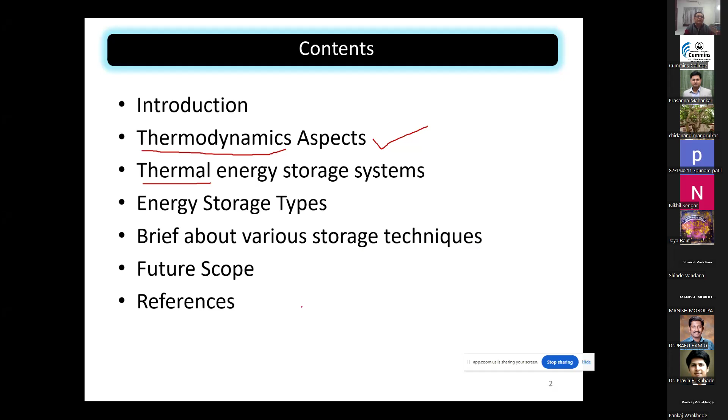Specifically, this will be related to the storage of thermal energy. There are other sorts of energies like electrical, chemical, mechanical, but we will only discuss the thermal energy storage system. Then energy storage types, what are the different types of storages, a brief about various techniques used and upcoming techniques, future scope and references. This is the broad outline of the presentation I'll be doing today.

We know that the energy system plays a key role in harvesting energy from various sources and converting it into energy forms required for application in various sectors. That means we use energy in various sectors in our day-to-day life: utility, industry, building, transportation. So no doubt that energy is an integral part of our living.

And spiritually, if you see, they say that the spirit which is there in our body is nothing but the energy, that is the spiritual energy. We always used to refer to that.

So energy sources like fossil fuels, all of us know that fossil fuels are used for getting energy traditionally because they are the traditional source of energy. They are storable whenever required. Whenever they are not required, you can store the energy or store these fuels.

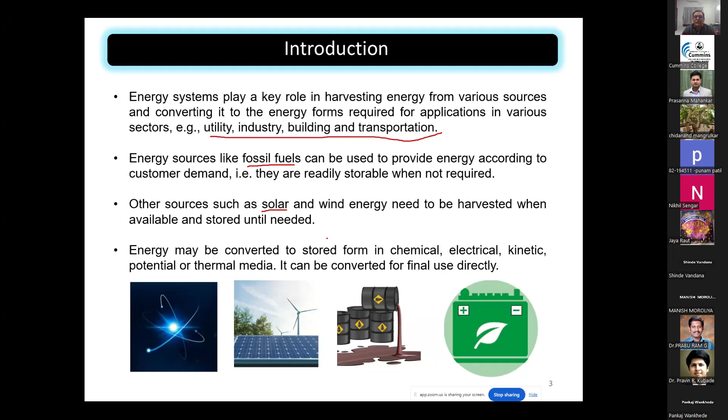For some cases, the conversion is possible. For some cases, direct conversion is not possible. But it is the easiest thing to convert into electrical energy, so that is the convenient way for storing energy.

Now, before we discuss about the conversion of energy and storage of energy, we have to look at the fundamental laws, basically the thermodynamic aspects of energy. Are all of you aware of the thermodynamic aspect of energy? Can you say yes or no?

Hello, can you hear me? Yes, sir. Let me check, probably the participant, you can unmute yourself. Earlier the setting, anybody? Yes, sir, it is audible.

Very good. So, can you tell me what do you mean by energy? Simply, we can tell that particular thing, sir, it is having that particular tendency to do the work. Yeah, the ability to do that work.

Energy is basically, we have studied during our school days, that it's a capacity of a body to perform the work or produce changes in the environment. It is the force that drives and enables things to happen.

So we use the word energy more frequently. When we study the conversion of energy, we should know what exactly energy is. So energy is a capacity of a body to perform work. For example, if we say he is a very energetic person, that means he's very active, he has the capacity to do the work.

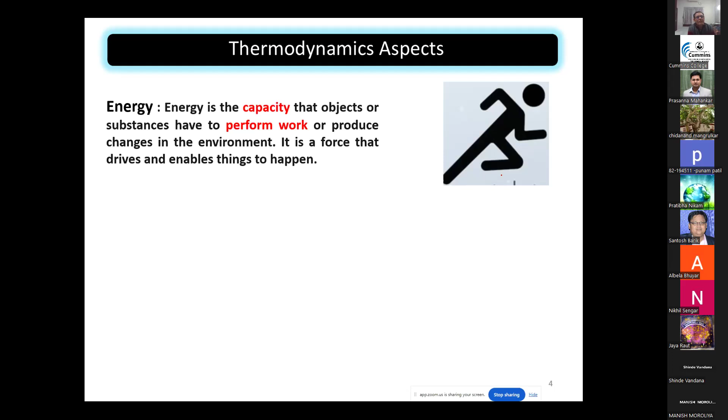It can only be converted from one form to another form. That means this law only gives us the idea. What do you mean by the law, by the way?

Why is it not called a theorem? Any idea? Theorem means the terms which we can prove in that particular way. Yes, that is very correct. Rather, a law can be a little bit flexible or feasible to turn out in the concepts.

Definitely, a law is basically the observed facts in nature. That means whatever law statement is given, we follow it as it is. We don't question how it is true and all, because this is based on fact.

You will not get any proof in the book for the first law of thermodynamics. No, you won't get it. These are basically the facts which are observed in nature, and the first law of thermodynamics is the law of conservation of energy also.

So when we study energy storage, we should know the basic thing: that energy will remain constant, it can only be converted from one form to another form.

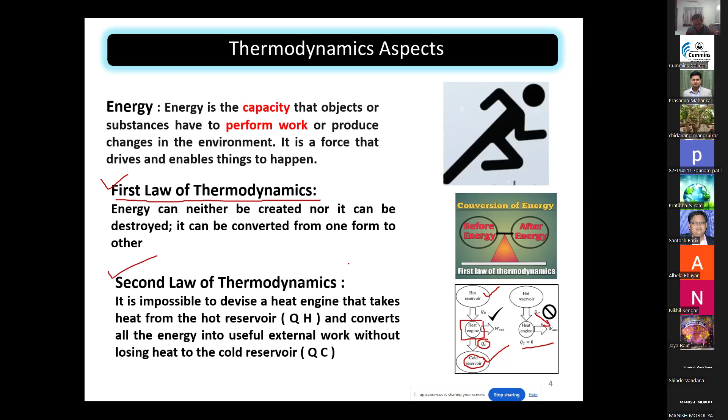This is by law, and that means some amount of heat has to be rejected to the environment. So understand that if you want to store energy in any medium, then some amount of heat in some form should get rejected. That means you cannot store 100% of the heat, so losses are bound to be there whether we like it or not. Otherwise it would be an engine working with only one reservoir, which is a violation of the second law of thermodynamics. So please try to understand that whenever we want to store energy, some amount of heat or energy has to be dissipated. So that is the meaning.

Now, energy storage system. So here the basic system is a pumped hydro storage. Pumped storage electricity is a method of storing and producing electricity to supply high peak demands by pumping water from a lower reservoir to an upper reservoir.

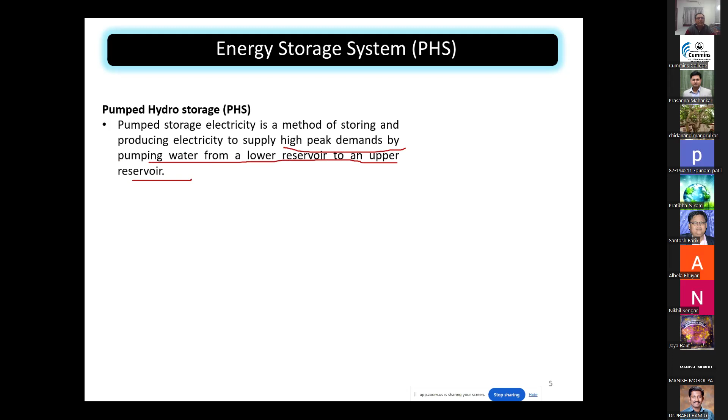So if you see this kind of system, it is basically: you have the lower basin, then a turbine, or there will be a pump which you use to store the water at the higher basin. That means you are basically increasing the potential energy of the water. So this is the potential energy of the water.

Now whenever it is required, you can allow this water to get back through the pump. Now the pump will become a turbine. A turbine is basically producing energy and you can supply it. So when the power demand is high, water flows from the upper reservoir to the lower reservoir, activating the turbines to generate electricity.

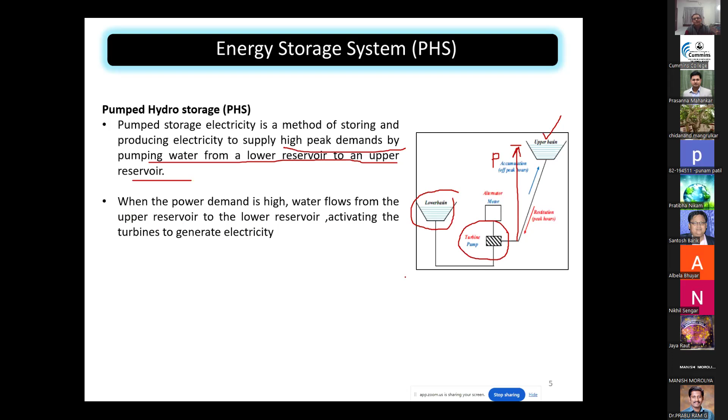Basically, this turbine is connected to the generator to get the electricity. So this is the simplest to understand. But this suffers with certain kinds of drawbacks that we will see.

The first advantage is this is very fast responsive. That means whenever you require the energy, you can start this particular system and get the energy. That means here you store the energy in the form of water.

So water becomes the storage media for this kind of system. This is the advantage of pumped hydro storage, and the major drawback lies in the scarcity of available sites for two large reservoirs and a long lead time, around 10 years. That means if you want to build such a system, it is going to take a lot of time. Since I do not work in this particular field, most of the presentation content I have taken from the literature, some research papers which discuss such energy storage systems.

So it says a long lead time, typically around 10 years, is required for such a system. Basically, you can store energy in the form of water, that is potential energy, convert that into mechanical energy with the help of the turbine, and then convert that mechanical energy into electrical energy. So there are going to be losses: first the losses in this section, then losses when you generate the electricity, and for transmission and distribution, which you people are very much aware of.

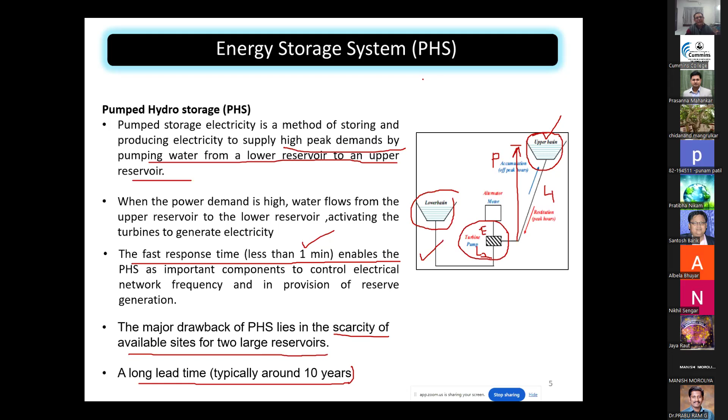The second one is the flywheel energy system, and most of the time it is used for storing energy. Flywheel is similar to a capacitor in an electrical circuit. In mechanical engineering, most systems use a flywheel, for example internal combustion engines. Then in punching operations, they use a bigger flywheel for storing energy, and then they take out the energy from the flywheel, and that is supplied when energy is required.

So are you aware of this? Have you seen the flywheel by any chance? Yes or no? Everyone is aware? Have you seen the flywheel in internal combustion engines by any chance?

The literature says flywheels have been used to store energy for thousands of years, a very old technology. They can have energy stored in the rotational mass, whereby you can increase the rotational kinetic energy of a flywheel, store its kinetic energy, and release it upon demand.

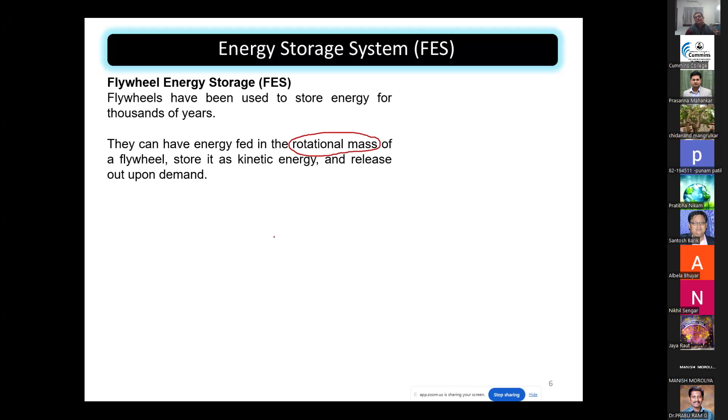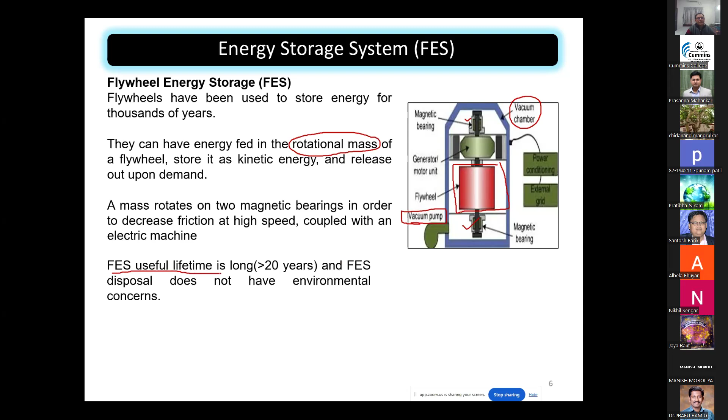This is very important, and I will tell you the reason. The flywheel energy storage useful lifetime is more than 20 years, meaning it has quite a long working life and is not having any kind of environmental concern.

If you want to discard this, meaning once it's out of function and you want to throw it away, disposal is not a big issue as far as environmental effect is concerned.

For example, if the useful life of a battery is over, disposal of the battery becomes a very problematic thing, specifically lead acid batteries. Recycling is done, but not to 100%. But that is not the case with the flywheel.

Flywheel is basically a metal part. You can use it; there is nothing that can wear out or get damaged. You can reuse the flywheel. The only problem happens with the magnetic bearing. Now, this vacuum pump is used to take out the air because that reduces the shear resistance to the motion of the flywheel.

So it can increase the efficiency of the flywheel. If the air is inside this particular chamber where the flywheel rotates, then the air has got viscosity and may offer viscous resistance in which energy can get dissipated or some amount of energy can get lost. So in order to reduce these viscous resistances, a vacuum pump is used to take out some amount of air.

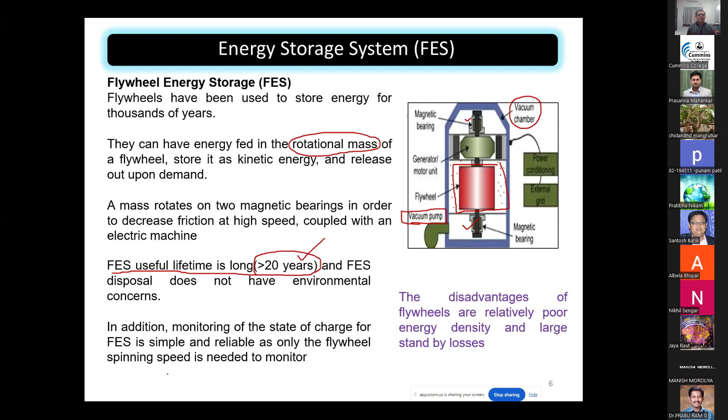These things we have discussed. Now the next slide is basically about the thermodynamics aspect, which should be in continuity with the previous one. But anyway, because I missed the sequence of the slides, it has come at a later part.

So we discussed the first law, we discussed the second law. Now there are certain shortcomings of this law we should understand. You know that the first law talks only about the conservation of energy. It doesn't tell us whether the process is possible or not, whether the process will happen in the forward direction or whether it is a reversible process. It doesn't tell that. Then which type of process is this - whether it is a spontaneous process or a non-spontaneous process? So it doesn't give any idea.

It only says that if there is energy interaction, then before and after, the energy will remain constant. That means this is not sufficient for us to analyze any kind of storage system.

For example, if you have this storage media - it can be liquid, solid, or gas - and you are supplying energy to it, now if you want to use it, this law, if you rely only on it, only says that whatever energy is here before entering, the same amount of energy has to be there. It only talks about conservation. But if you want to take out the energy from this system, it won't tell you whether receipt of that energy is acceptable, or how much you can withdraw. That is not given.

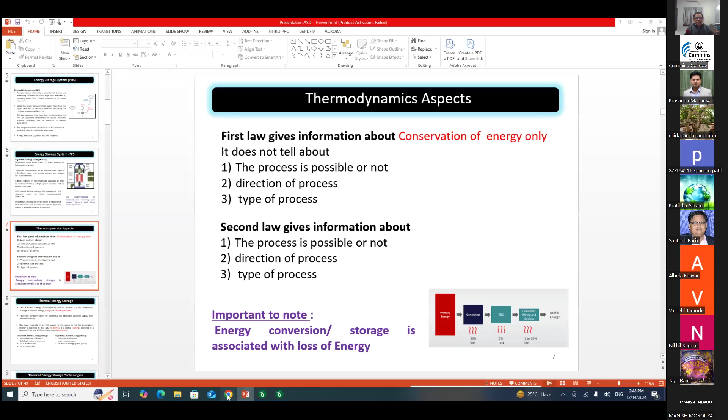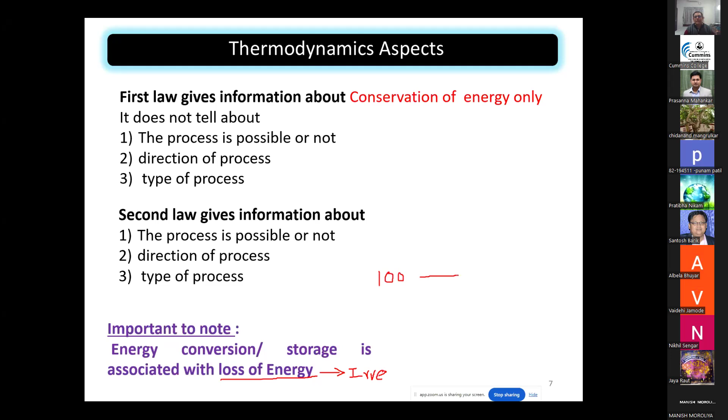Yes sir, okay. So we need to see that the loss of energy will always be there, and this is basically causing irreversibility. That means the process becomes irreversible, and believe me, the literature says that no process is reversible in nature. All processes happening in nature are irreversible. The moment we say irreversible, we mean that if you store 100 joules of energy, the outcome will not be 100 joules - there is a limit to the output depending upon the inherent property of the storage medium.

That is why you can have the comparison of different methods. So I hope the thermodynamic aspects are slightly clear in your mind. I'm not saying fully clear because we have not done the mathematical analysis, but those who are not from a mechanical engineering background might have got some idea regarding this. That means you can see the energy storage systems in light of the thermodynamics laws. Am I correct or not?

Are these aspects helpful or not? How do you compare two energy storage media? Hello? Participants, please respond. You can unmute yourself, we have not muted you. Hello sir, yeah.

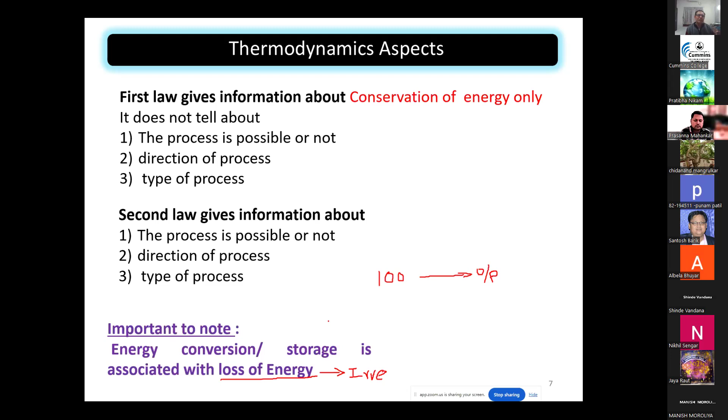Okay, no, that is correct. But what I mean to say is that when we talk about energy aspects, my intention is to give you this viewpoint: every time you need to verify your systems on these two laws, because if they violate - whatever statement or assumptions you make while designing the energy storage system, you should always counter-check that those systems are logically tested on these two laws. That was my intention. There are n number of systems available, a lot of books and research papers available, but when examining those systems, if a student brings a system and claims something, you should be in a position to verify it against the test of these two thermodynamics laws, and this will give you a clear-cut idea.

Okay, so that was the intention. Now coming to thermal energy storage systems, as the topic was given to me, since I am from the thermal background, I'll be more concerned about thermal energy storage systems. Usually thermal energy storage systems are temporary storage of thermal energy at high or low temperatures, meaning they can be used to meet short-term requirements.

Now, they are normally useful for correcting the mismatch between the supply and demand energy. That means if there is some discrepancy, they are not the sole system which will supply the energy, rather they will correct it most of the time.

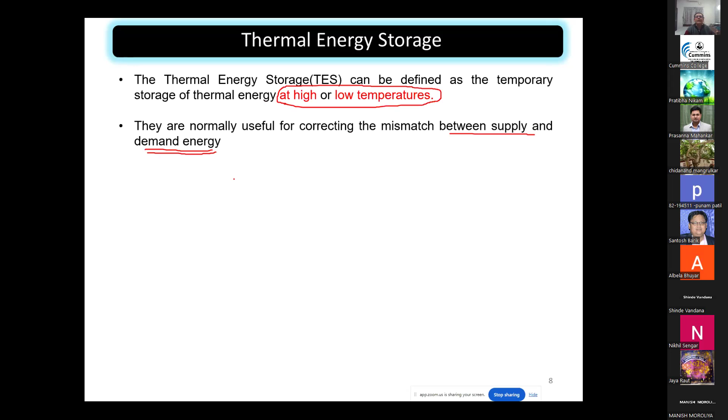Now, the basic principle of thermal energy system is the same, meaning you have charging, then storing, and discharging. This can be understood by a simple graph in the subsequent slides. So first you charge the system, then store the energy for some time, and then discharge it. The same thing applies to the battery also - first we do the charging, then we use that battery wherever we require the energy.

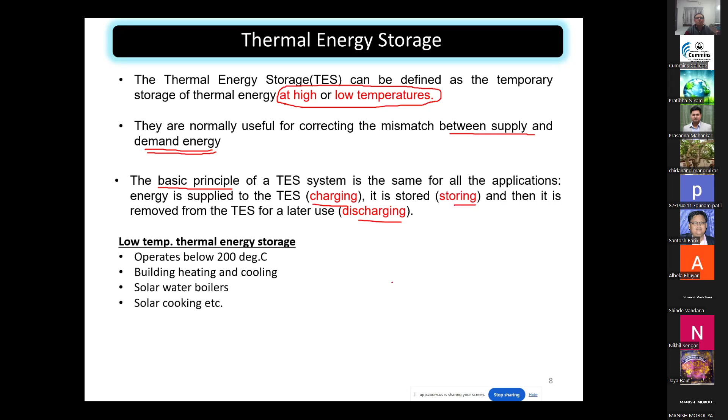So now, how do you classify low temperature thermal energy storage? There are many ways to classify this depending upon the time period - short duration, long duration, and so on. But broadly, people say that low temperature thermal energy storage typically operates below 200 degrees centigrade. Generally building heating and cooling, solar water boilers, and solar cookers - most of these fall in the category of domestic uses. And high temperature is for industrial application.

You can have waste heat recovery, which usually happens in the thermal power plant. The waste coming out from the turbine, the steam, is having a certain amount of energy which you can use by recovering the heat. A small example of waste heat recovery is the turbocharger fitted in internal combustion engines. Most of you are aware of the principle of how heat recovery is done in the turbocharger. Yes or no?

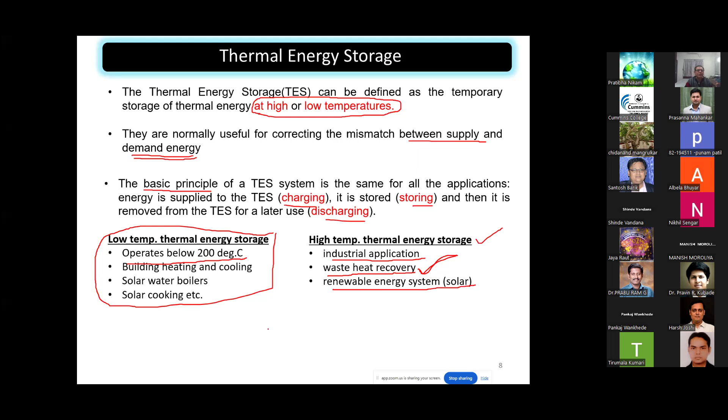Then renewable energy systems, basically the solar energy system. So large scale applications where the heat is high are high temperature thermal energy storage, and where the heat is low is low temperature thermal energy storage.

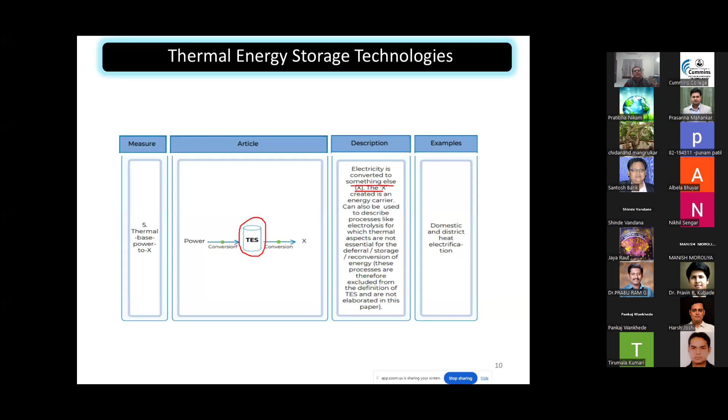Now, types of thermal energy storage. If you have to design a thermal energy storage system, it can be based on sensible heat, latent heat, or thermochemical heat storage. Now, major research is going on in the thermochemical heat storage area. Most systems are now shifting from the first two to thermochemical heat storage - basically batteries and other technologies, including hydrogen, are of this type.

Now as the name suggests, sensible heat is without phase change. That means if the storage media has no phase change - if you are storing energy in water, the water will remain water if it is sensible energy storage. If it is latent energy storage, then you can have mixed kind of phases - that means you can have water as liquid plus steam.

Thermochemical is basically when you have a component which, when you supply heat, degrades or decomposes into two components which you can separate, store separately, and again use it back.

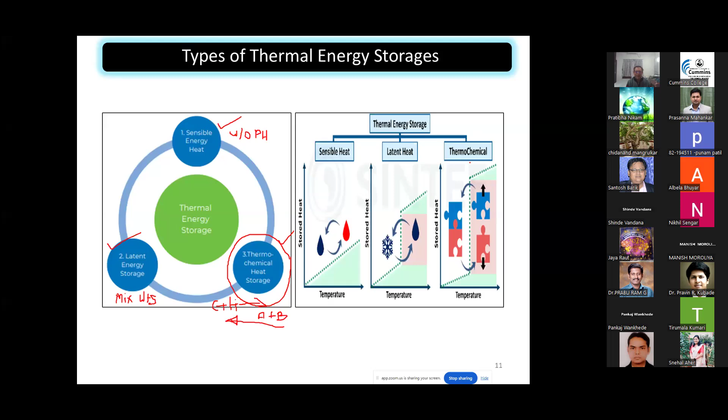For example, if you take the latent heat energy storage, the phase change material is used, because the name itself suggests the solid gets converted into liquid and vice versa. So we'll see them one by one, how to estimate the capacity of the thermal energy storage.

So the thermal energy storage technologies are based on sensible, latent, or alternatively upon reversible thermochemical reaction. The system based on sensible heat of material includes hot and cold water tanks - generally these are hot and cold water tanks, it uses the word water, nowhere will it mention steam or vapor. The underground thermal energy storage, UTES, which is the short form used in most of the literature, or specific materials and structure - by the way, how do you calculate this sensible heat capacity?

What do you mean by sensible heat? Which is the parameter which is important for this sensible heat? Temperature, sir. Okay, what else? Temperature is anyway important in all the three things.

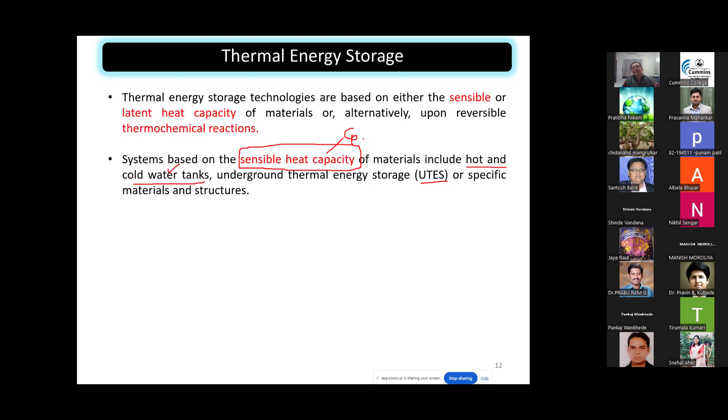We'll see this - it is basically the specific heat capacity, that is CP. You must have studied CP and CV - specific heat at constant pressure and specific heat at constant volume. So gases have two specific heats, at constant pressure and constant volume, whereas liquids and solids have only one specific heat. Based on this, we can estimate - I have written the expression, I will tell you the simple expression.

Then latent heat is basically phase conversion - the temperature remains constant. Common examples are ice storage systems, which are utilized to relieve peak air conditioning loads in daytime hours in most countries. If the heat is more, then you use ice storage to absorb the heat, so that your ice starts melting at constant temperature.

Then PCM based - usually if we are discussing material, paraffins, esters, fatty acids, then salt hydrides. These are materials developed to absorb or reject heat over a narrow temperature band, meaning you've got to have the fixed temperature - during that, it will absorb the heat, and then again will start increasing the temperature.

So as you can see, during winter days, the coconut oil will reject the heat and get solidified because the temperature is going down. Once you keep that bottle into the sunlight, it will absorb the heat. How does heat absorption take place? Because it has got specific heat capacity - the amount of heat required to raise the temperature of 1 kg of mass of the material through 1 degree centigrade, that amount is known as the specific heat, which is at constant pressure if it is liquid.

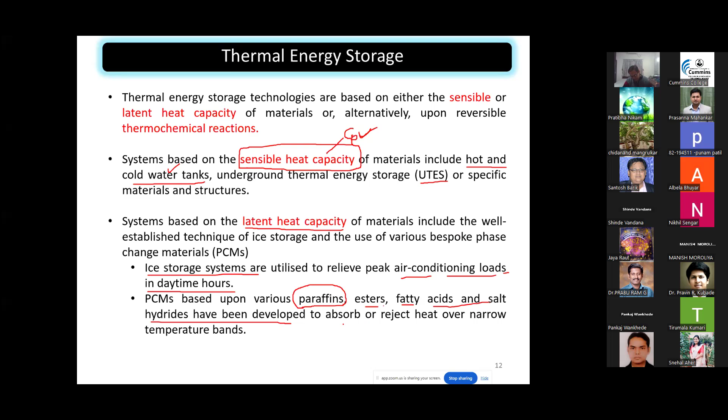So that is basically the phase change material. Similarly, paraffins are also phase change material - you might have seen that when you light up a candle, the wax gets melted. So these are basically paraffins which can exhibit such kind of property.

Now, the broad classification - this I have taken from the book that I mentioned in the reference, so it's not created by me. Thermal energy storage: physical heat storage, chemical heat storage, that will be separately discussed, which is not the purview of the present presentation. So sensible heat - you can store it in solid or liquid, basically rock or metal, these are the things which are in use. I will give you the list of materials which are used, also in tabular form.

The liquid is basically thermal oil, molten salt, and water. They can be used as the medium for storing the heat.

Now the latent heat - as you know, in sensible heat the phase change is not allowed. In latent heat storage, the phase change is allowed. Basically there are certain materials which absorb the heat and change their phase.

So there you can have liquid to gas - during absorption the media is in liquid form and gets converted into gaseous, for example water to steam. Then solid to liquid, ice to water - during melting, the ice will absorb the heat. And solid to gas, and solid to solid.

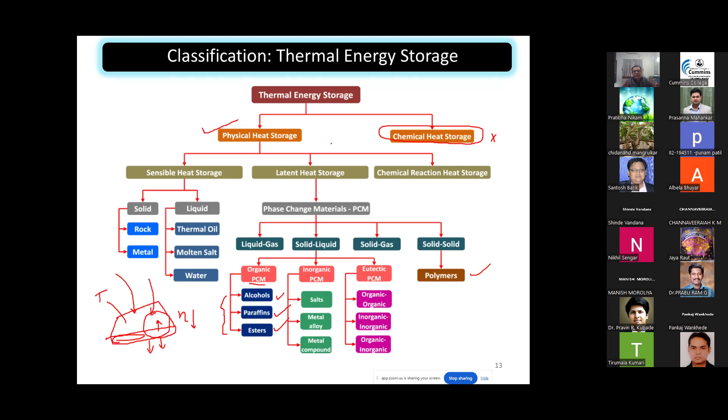Is this clear? Yes, sir.

Now, if you discuss the sensible heat storage, the amount of heat stored is proportional to density, specific heat, volume, and variation of temperature. Why I have made it in red is that whenever you try to select this kind of storage, you need to consider the property of the storage media. The prominent properties are density, specific heat, volume.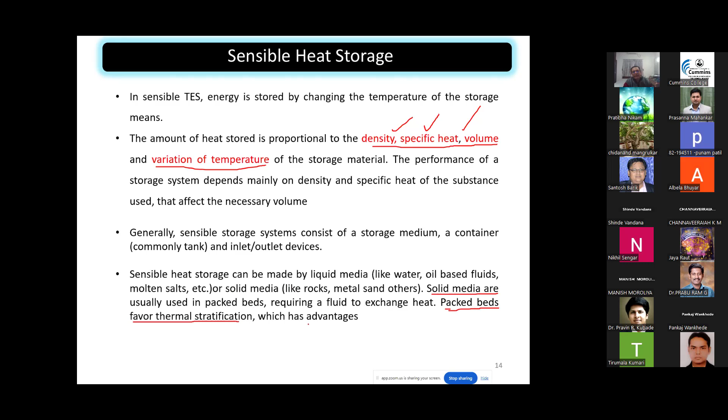Generally, a sensible storage system consists of a storage medium, a container - commonly a tank - and an inlet. The size is very big, and an outlet device. Then it has a given type - usually if it is a solid media, then packed bed favors thermal stratification, that means gradation, which has the advantage that you can take out the heat wherever you want.

So working of sensible storage - it basically works by changing the temperature of the storage medium, typically water or rock, without a phase change. I have explained this - they absorb heat when heated and release it when they cool down.

They are basically cost effective because not much is required to be done for it. They are a passive kind of cooling system, or you can say the storage is of a passive kind - there is nothing which you need to provide externally. Only if heat is coming, it will absorb. Now that is the passive type of storage system.

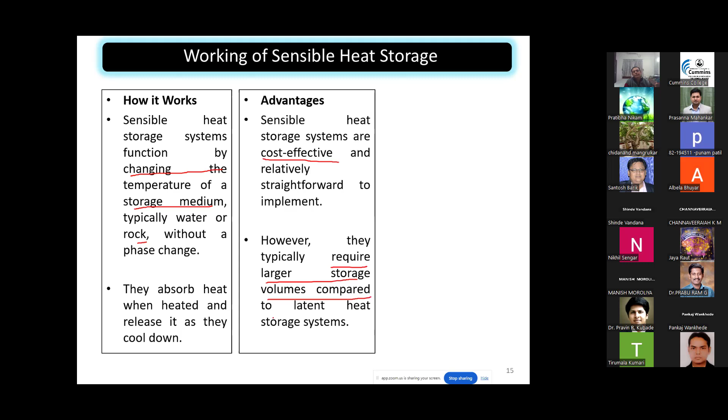Now generally they require a larger volume compared to latent heat storage systems, so that is a disadvantage as well. And sensible storage systems have lower energy storage density compared to latent heat storage systems. The storage density talks about the energy stored per unit mass of the media - this is in joules per kg.

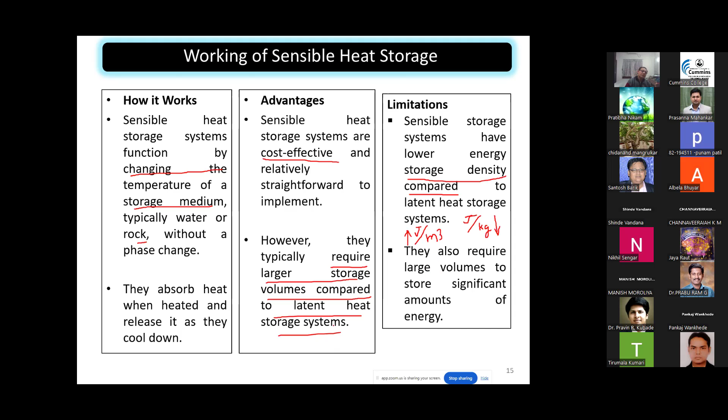Energy stored is energy in joule divided by kg, sometimes referred to as joule per volume when discussing volume. These systems require large volume, so energy density is more for some systems and lower for others. There will be certain advantages and disadvantages associated with this. Now let's see how the calculation is done.

The amount of heat is the integral from initial temperature to final temperature limit, of mass of the medium, specific heat capacity, and temperature difference. The major factor is this: if the Cp is more, the amount of heat stored is going to be more. Delta T will also make a difference, but this delta T is related to the speed of the process.

If the delta T is more, it is going to absorb more amount of heat. This will also affect it, but according to Newton's law of cooling, delta T is basically the absorption factor, while the Cp value has to be inherently more. You might have heard that certain mediums get heated quickly and also cool down quickly - that is basically the effect of Cp.

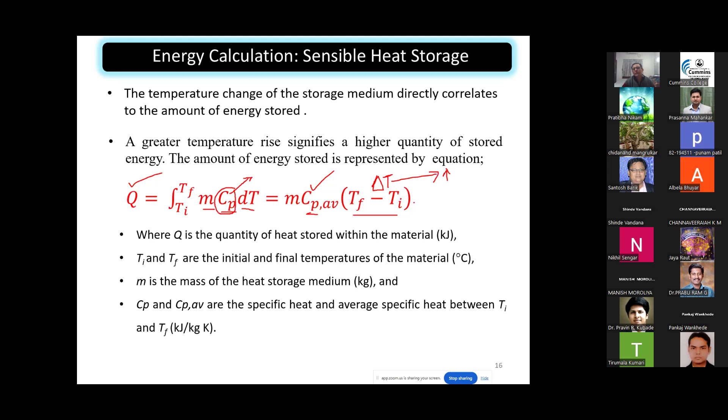Water takes more time to absorb heat and also takes more time to lose heat because it has a higher value of Cp, specific heat. Whereas if you mix water with ethylene glycol, the specific heat capacity reduces, so the solution heats up quickly and cools down quickly. So Cp plays a very major role. This is the simple expression to calculate how much heat it has absorbed.

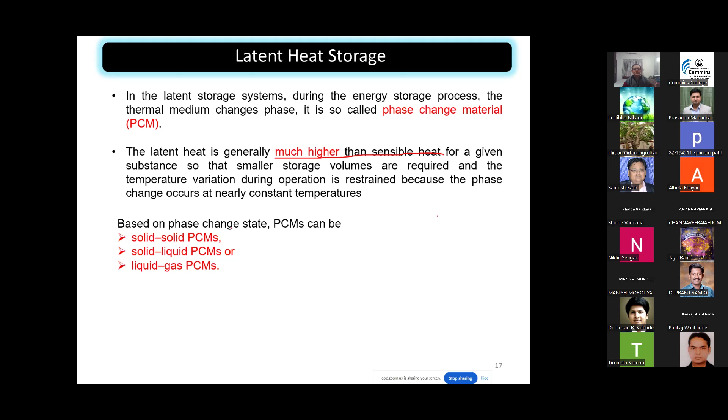Now latent heat storage. In latent heat storage, phase change occurs, and the latent heat is generally much higher compared to sensible heat. Based on phase changes, you can have phase change materials: solid-solid, solid-liquid, liquid-gas. Solid-liquid phase change is most suitable for many applications because it is compact.

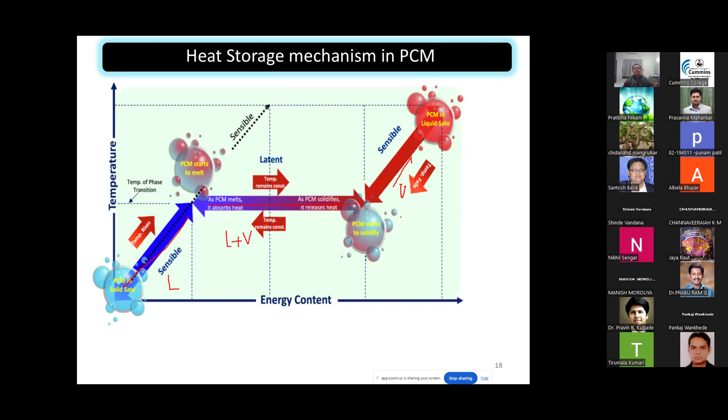So this is basically storing energy in terms of superheated steam. If you relate it to water, it is also a phase change material, but it is not generally used for this purpose - I'm just giving an example for correlation. Usually solid to liquid will be used most of the time. So this graph gives you the idea.

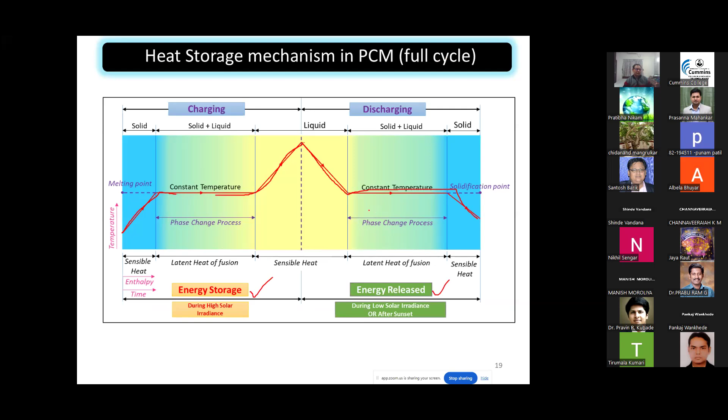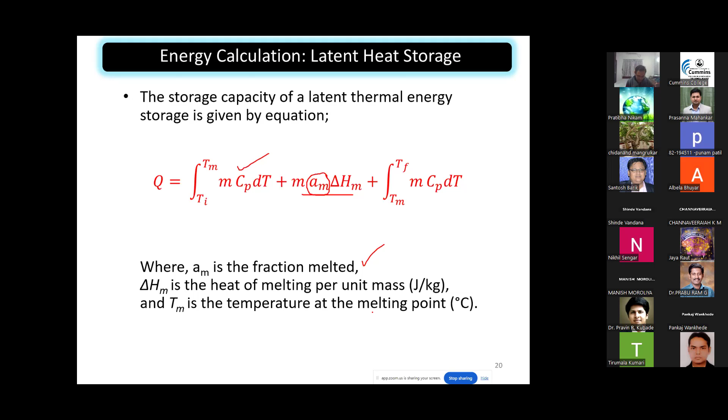Even for a recent example, lithium ion battery cooling is also using phase change material with active cooling techniques. So phase change technology is going to be continuously upgraded. New synthesized materials are also being tried and verified. Those who are interested can get it in the literature, or whatever presentation I share, you can refer to the reference section.

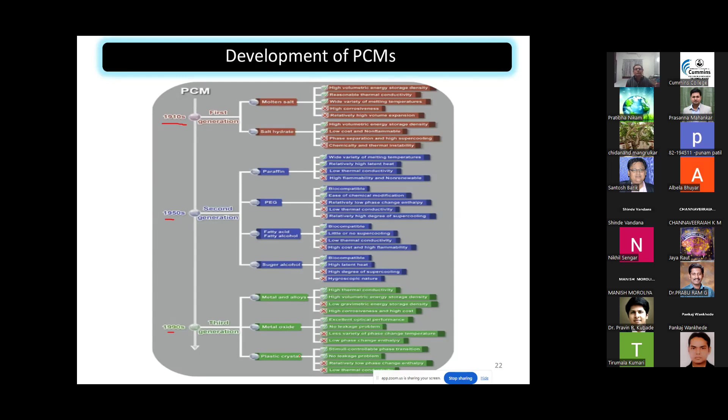Then there is one interesting thing, the energy storage duration. If you have to choose these kinds of technologies for thermal storage, you need to be very clear. Energy storage duration is primarily determined by commercial requirements, meaning how long you want to use it and for what purpose.

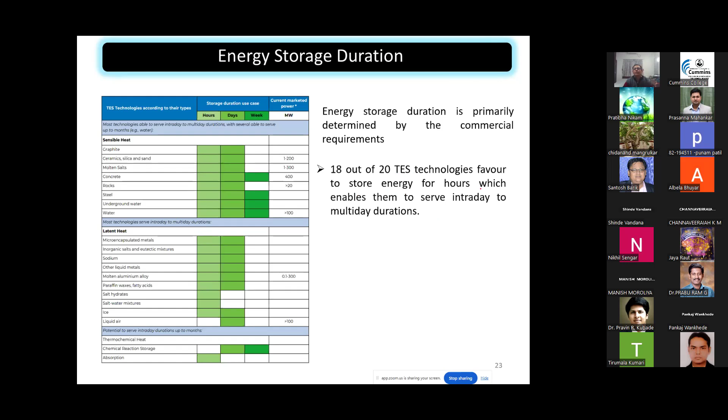Based on this, you will find that 18 out of 20 thermal energy storage technologies favor storing energy for hours, which enables them to serve intraday to multi-day duration. So this is in hours. You'll find that this technology and this second one are not suitable for this. Rest all are suitable.

Then 17 out of 20, 85%, favor storing energy for days, ensuring multi-day duration. So only 1, 2 and 3, these three technologies are not favorable for storage of energy for days. This chart is very important, it gives you a glance at the technologies available and their duration.

And then 5 out of 20 favor storing energy for weeks, some for months. So you can say concrete, steel, underground water, and water - these can basically store energy, along with chemical reaction storage. So they can be used for months.

I got this from one of the reports, and I thought of sharing with you. This gives you the idea that if you have to use different kinds of materials for storing energy, which one is suitable and how long it can work.

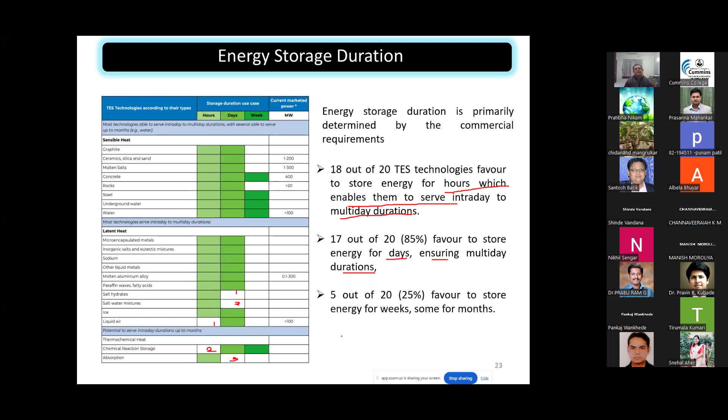Now technology readiness, this is another important chart. You can make out that 7 to 9 include technologies up to proof in operational environment. What it says is 11 out of 20 technologies - these are out of 20 total - this is quite a good number, more than 50%.

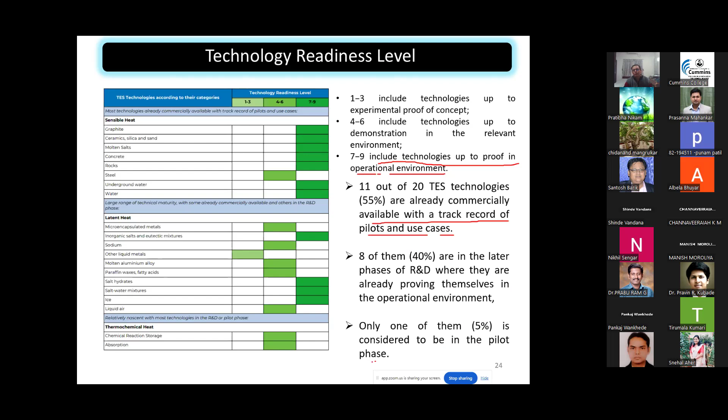Then 8 of them are in latter phases of R&D, where they are already proving themselves in the operational environment. And the last one, only one of them, 5%, is considered to be in the pilot phase. The remaining technologies, like liquid metals, there is a lot of scope as far as research is concerned in this area. So instead of doing a lot of literature survey, if you refer to these two charts, you will know where people are moving as far as energy storage is concerned.

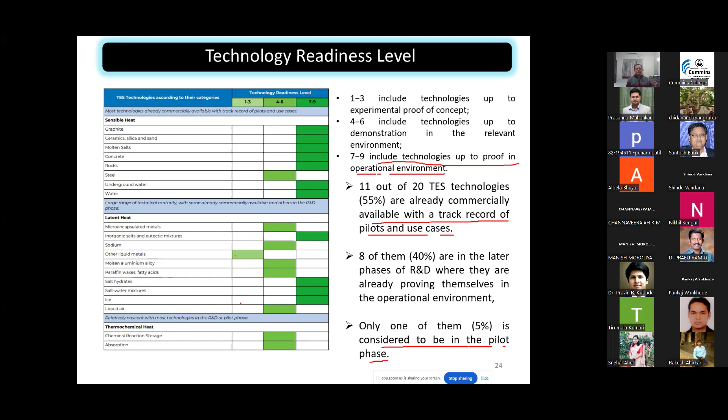Now thermochemical storage, this is the most important part. Chemical storage technology basically involves a thermochemical material to which you supply heat, and then it will be broken down into two components - this is the reaction. Then again, if you want to recover the heat, you reverse it. That is why I've shown you this reversible arrow. So that is how it works.

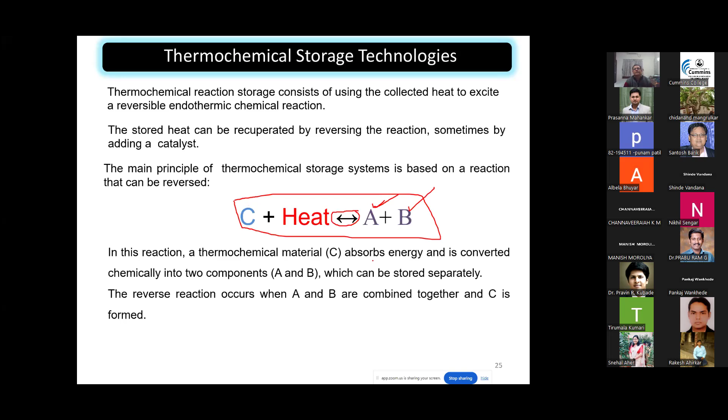Looking at the time, I am hurriedly covering this, there is a lot of slides which we have to cover. So the main process in thermochemical storage is charging, storing, and discharging. This is the common thing. The charging process is endothermic.

Naturally, it is going to absorb heat. The thermal energy is absorbed - this is an endothermic process, meaning heat is supplied to it and it is broken down into two components. Storing: after the charging process, components A and B are separately stored with little or no energy loss. The materials are usually stored at ambient temperature, leading to no thermal losses.

And after storing, discharging: A and B are combined in an exothermic reaction and energy can be transferred. That means this gets reversed - A plus B will give you C and heat. Please note that the forward reaction is endothermic, the reverse is exothermic, but losses will still be there. You cannot do away with those losses, you can only minimize them, not eliminate them.

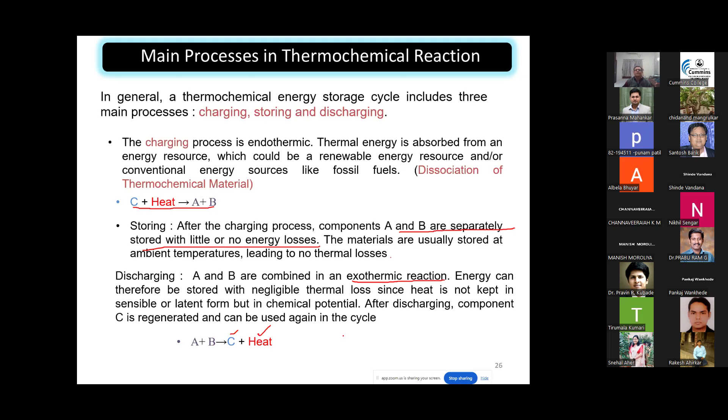So this is the main concept behind thermochemical reactions, which can be used as a storage mechanism. Now people have found potential materials for thermochemical reaction: magnesium sulfate, silicon oxide, iron carbonate, iron hydroxide, and calcium sulfate.

So these chemical details are given: energy density, storage. This is gigajoules per meter cube. So these things are there.

Please note that these things are in the research phase. They are not mature yet, they are potential materials. The title says that. I have read the paper in which they were saying that people are doing research on this to find out.

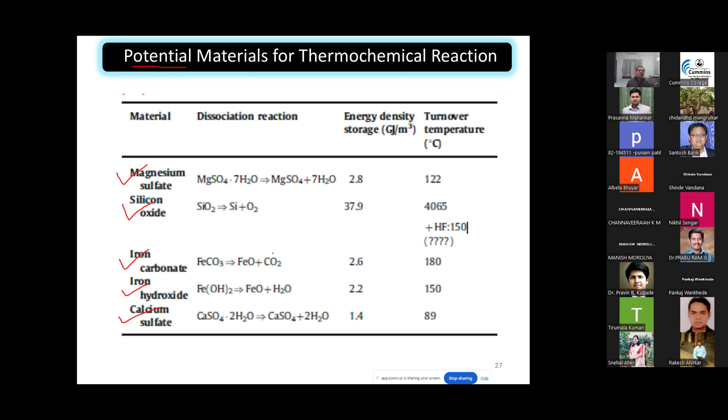Then the remarks on the thermochemical energy storage is: thermochemical storage has higher energy density relative to PCM.

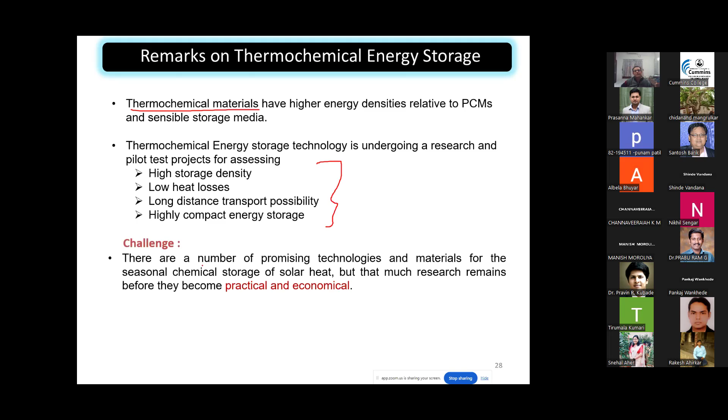The challenge is there are a number of promising technologies and materials for the seasonal thermochemical storage of solar heat, but much research remains before they become practical and economical. Right now, this is the difficulty or the challenge you face in case of thermochemical materials.

So there is a good research area available. If someone wants to pursue his research, he or she can opt for these kinds of areas if having interest in this.

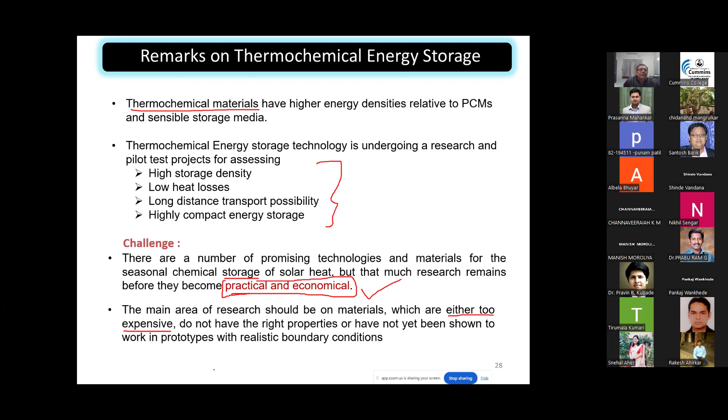Now, the main area of research should be on materials which are either too expensive, or even if available, do not have the right properties, or have not been shown to work in prototypes with realistic boundary conditions. So these are basically the challenges as far as thermochemical energy storage materials are concerned.

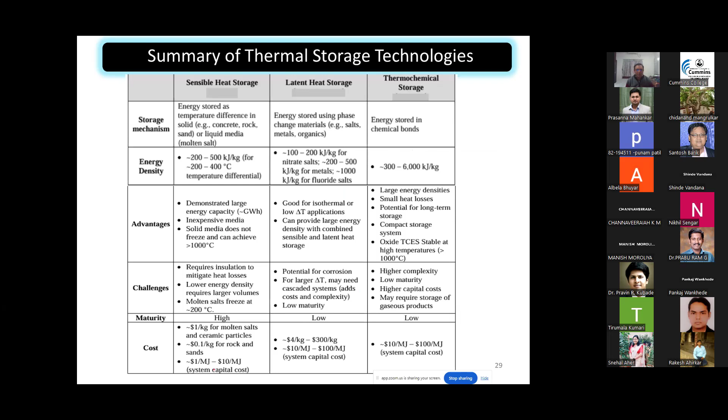Now this chart gives you the summary of all the technologies, their positive and negative points. So if you happen to get the time, please go through this, and it will give you a fair idea about the status of these technologies.

Now with this, we will be concluding on thermal storage.

Hydrogen based energy storage. Everyone knows that every now and then the newspapers say a lot of things about hydrogen as an energy source, because it is one of the most efficient, cleanest and lightest fuels.

It is not found naturally and must be produced from primary energy sources, expected to play a major role in future energy systems. Like electricity, it must be produced and transported.

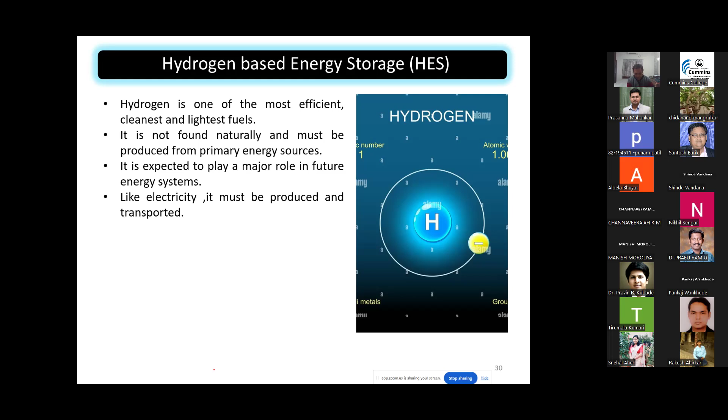This is possible. But electricity suffers one drawback: electricity must be used as it is produced. It can be stored only if converted to another form, but that is not the case with hydrogen.

Hydrogen has one additional advantage over electricity: it can be stored, and the future lies in this. It can be stored. If it can be stored in its as-is form, then nothing like it.

But you know that it comes with a lot of risk. So what are the potential risks? We will discuss that in brief shortly.

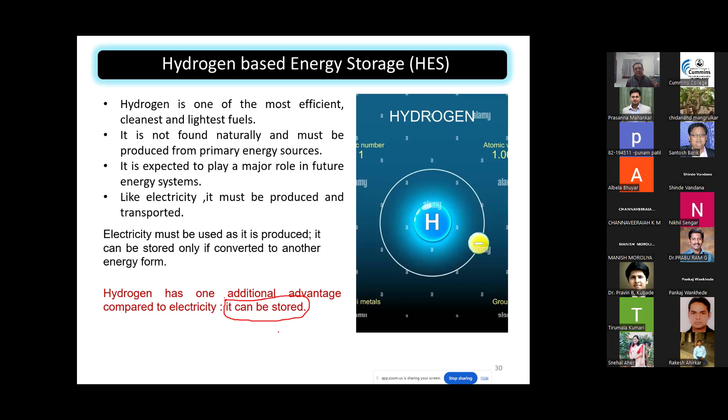The technologies for hydrogen storage: currently the literature says there are four main technologies for hydrogen storage, out of which two are matured and two are still in the research phase. One is hydrogen pressurization, and second is hydrogen adsorption in metal hydrides.

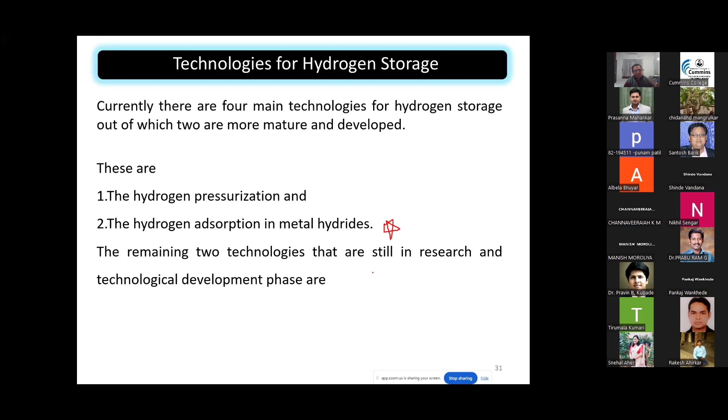This is a very promising technology, metal hydrides. People are working on this. The remaining two technologies still in research and technological development phases are the adsorption of hydrogen on carbon nanofibers—here comes the role of the nanomaterial—and liquefaction of hydrogen. So we'll see this.

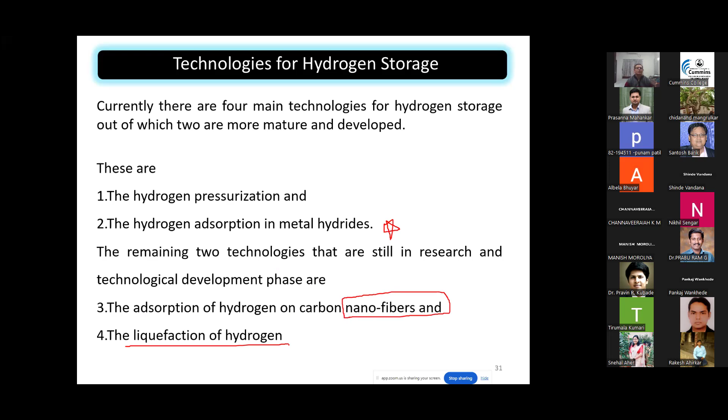Hydrogen production is a representative figure showing you can get energy from renewable sources. You use the electrolysis technique to decompose water into hydrogen and oxygen, store the hydrogen, and use it as a fuel for your application. About 4% of hydrogen currently in use in the world is produced by electrolysis.

Electrolytic decomposition of water to produce hydrogen is currently quite expensive. That means getting hydrogen from electrolysis is not very easy, or you can say it is a costly affair.

An advantage of water electrolysis to produce hydrogen is that instead of requiring large central facilities, individual facilities can be used and distributed. Distributed generation is possible in smaller units, which can be located near where the hydrogen will be used, in order to reduce storage and transportation cost.

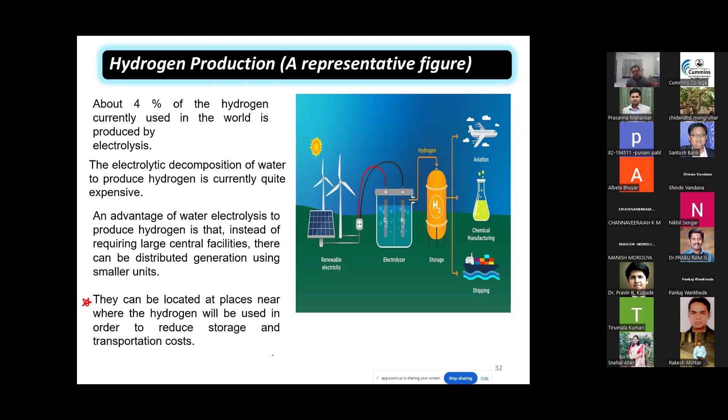But this comes with a disadvantage: if you start producing or generating hydrogen at a place, it may be dangerous, because carrying a hydrogen cylinder, if you meet with an accident, it can explode. So that is very, very dangerous.

So you can store hydrogen, basically as energy, at high pressure tanks. This is a common method at high pressure, but a large volume tank is required. If you are using hydrogen in a vehicle, then the tank volume is not small.

Then storage of liquid hydrogen in insulated tanks is another approach, but a significant disadvantage is that the process of liquefaction requires 30 to 40% of the final energy content of the hydrogen. So losses are more in this case.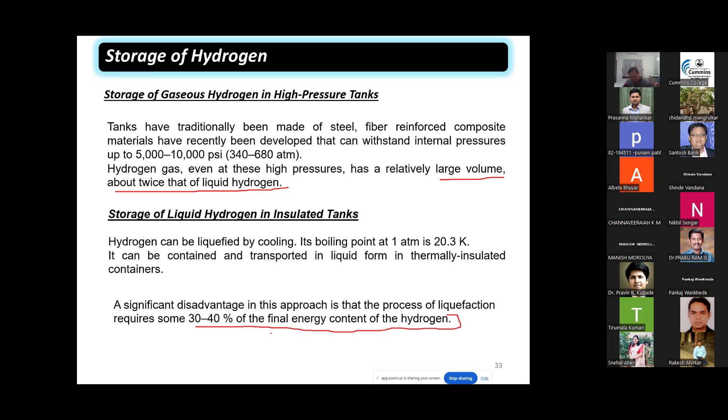Now the other method people have tried is storing protons in solid, that is using metal hydrides. The approach is to reversibly absorb hydrogen in solid metal hydrogen compounds called metal hydrides. For example, the metal alloy LaNi5 forms LaNi5H6, meaning it can store 6 atoms of hydrogen.

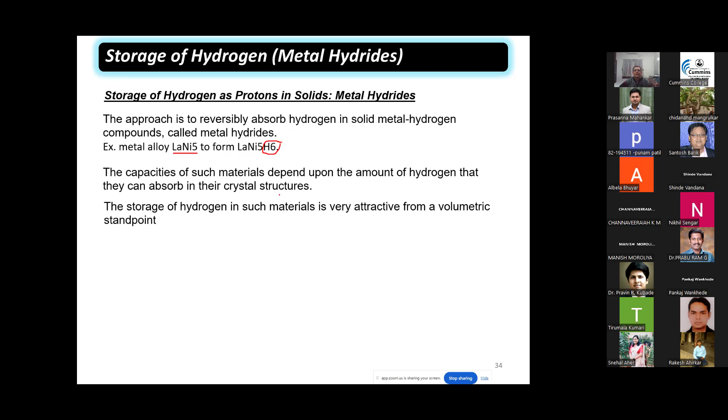The capacities of such materials depend on the amount of hydrogen they can absorb in the crystal structure. Storage of hydrogen in such materials is very attractive from the volumetric standpoint. The demerit of these metal hydrides is the relatively small amount of hydrogen they can store per unit weight, and there is also concern about the cost and large scale availability of such materials.

These are the technologies which are in the developing phase. Some of them are developed, but some are still in the nascent phase.

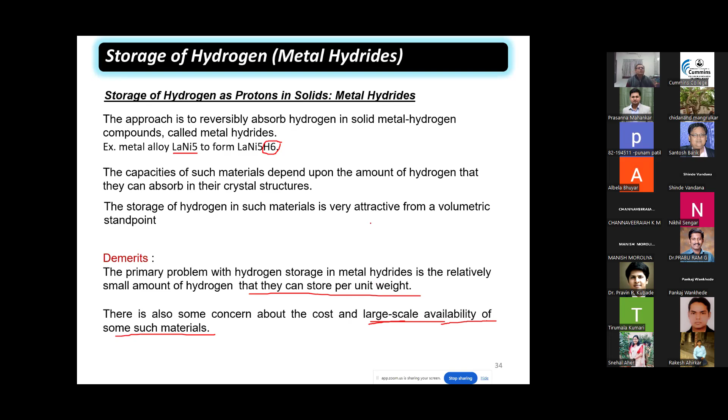So storage of hydrogen using metal hydrides. Then ammonia is another potential candidate, which is 17% hydrogen by weight. You can thermally decompose ammonia to give you hydrogen. So that is also another technology.

Apart from that, you can have other complex materials. It's not only ammonia; you convert other complex material into ammonia, and again break down the ammonia to get the hydrogen. So metal ammines, in which ammonia is coordinated to a metal ion, are one type of such material, for example Mg(NH3)6Cl2. This reduces complexity, since instead of using ammonia directly, you generate ammonia and then decompose it. That is the technology people are trying to use for generating hydrogen.

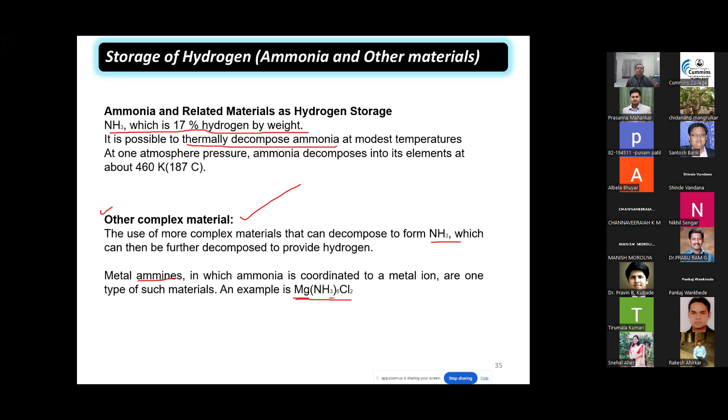Reversible organic liquids are also used, for example benzene and toluene. Electrolytic production of hydrogen, when electricity is readily available and inexpensive, involves reacting it with a simple organic molecule to produce a product containing more hydrogen, which means you can store this.

For example, you convert toluene into methyl cyclohexane, and then break it down to get the hydrogen. So storage becomes easy, with 6 hydrogen atoms per molecule. Both of these liquids can readily be stored in large tanks, and then you can produce the hydrogen.

But the problem is, you can use this hydrogen for stationary energy sources, but if you have to use it in an automobile, it becomes very challenging, because all these organic compounds or other complex compounds, if mounted on a vehicle, and if there happens to be a collision of two vehicles, it will act as a bomb. That is another major concern, and that is why, though it is a cheap fuel, it is not popular.

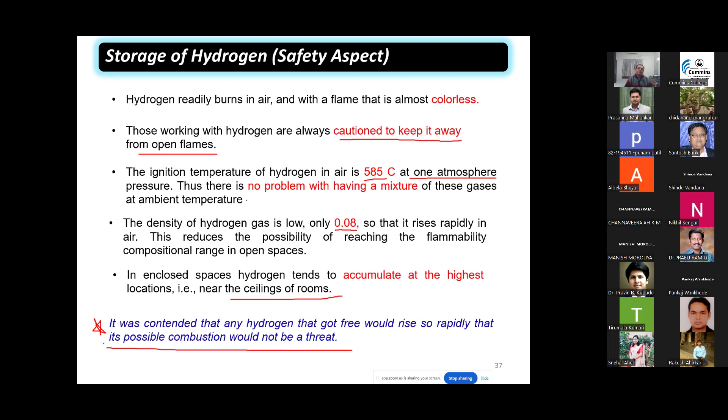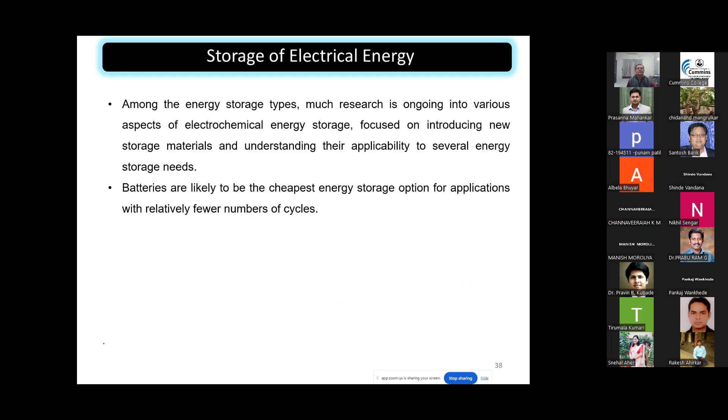So this is regarding hydrogen storage. Looking at the time constraint, I would like to stop here and just go through the remaining slides. Basically, storage of electrical energy, then simplified lithium-ion battery. This was the topic which I was planning to discuss, and at last the introduction to supercapacitors.

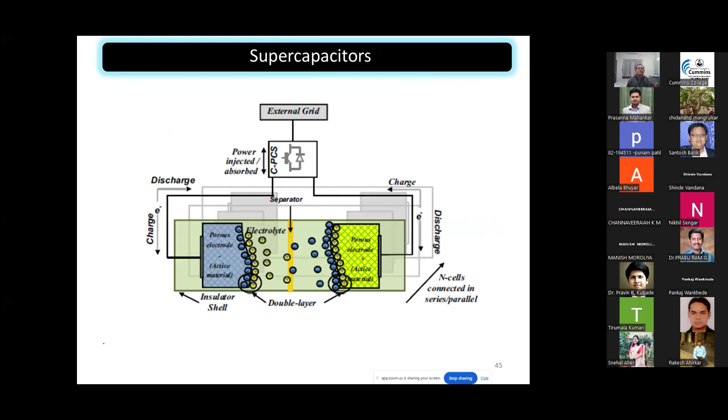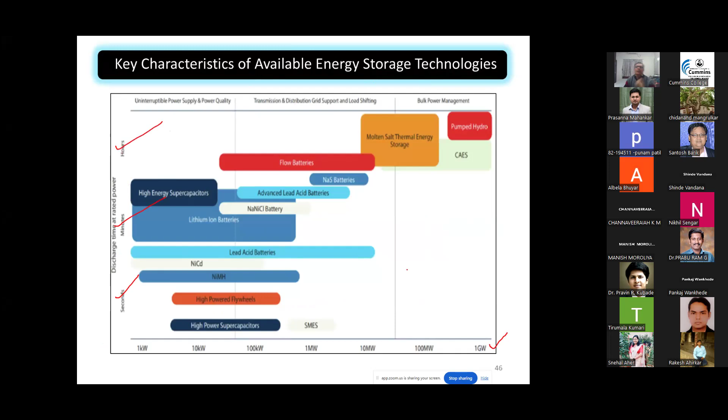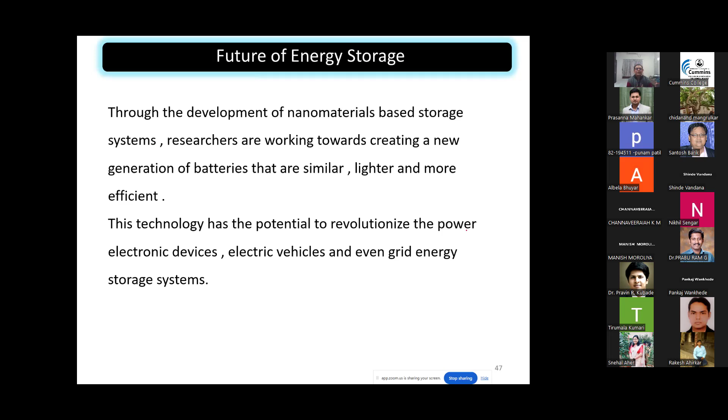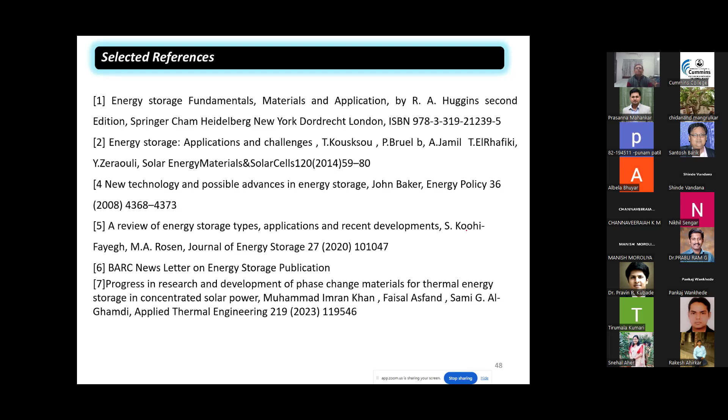So these are certain references which I referred for making this particular presentation. I tried my best to share with you whatever I could gather through this literature, because I'm not the person directly working on these kinds of technologies. Rather, we use this technology for our own purpose, meaning for cooling purposes rather than energy storing purposes. So with this, I thank you for listening to my presentation.